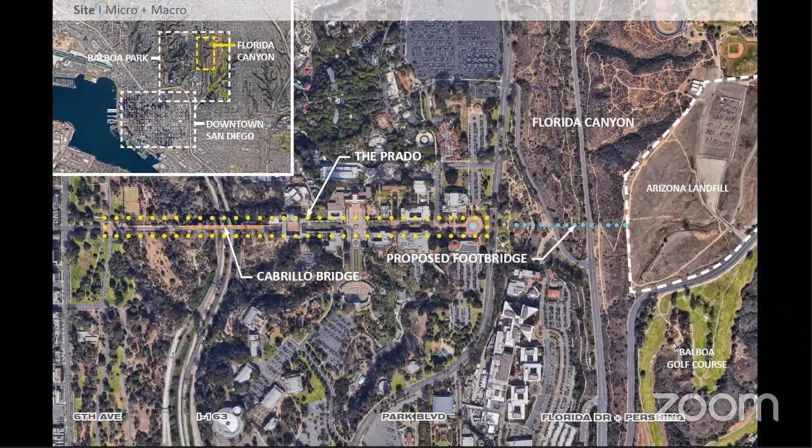There's a few reasons for a bridge at this location. The first is to facilitate an east-west connection, which is largely non-existent in the park. The second is to really spur development in the Arizona landfill. It's remained basically dormant for many years and is very much in need of a redevelopment, which I think can really be spurred by a footbridge. In fact, our master plan for San Diego really shows a footbridge at this location.

And so, as I mentioned before, the Cabrillo Bridge was a big source of inspiration, built in 1914 for the Panama-California Expo. It's a cast-in-place below-deck arch, and it has a great experience on top because it's completely open with all the structure tucked below. It creates a great experience, open views to the museums as well as downtown. And then below, it functions as a gateway in and out of the city when you're driving the 163.

The image below is the forming process of this bridge. It's said that there was 1 million board feet used in the formwork for this structure. And my proposal specifically seeks to eliminate formwork, push the boundaries formally for structural steel, and minimize the touchdown points, temporary or permanent, to the canyon ecosystem below.

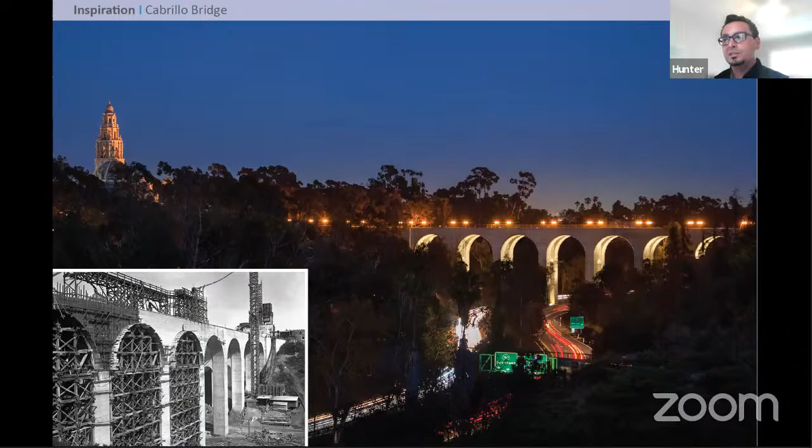And so there are many sources of inspiration for my design. One of them was the Cabrillo Bridge, and then the high degree of Spanish ornament that we see in our museums, from the Museum of Man and various other ones. Really just an incredible amount of relief, shadow, and light play on those surfaces that I really wanted to capture in the surface articulation of my design.

The second is the flora. There's a cactus garden that's quite large on the western rim, just next to the west entrance, and it features a lot of really beautiful flora, specifically this particular cactus, as well as the dragon tree, which has this really beautiful bifurcation in the structure that leads down to the trunk. And then we also have, oddly enough, scattered throughout the park, massive old fig trees, and they have this wonderful buttressing root system that's very fluid. And this concept of fluidity is something that permeates through my design, as we'll see.

And of course, the canyon itself was a source of inspiration. On the left there, we can see this network of trails caused by pedestrians, but also mountain bikers. It really has a cellular kind of network to it in its overall layout. But also the process of erosion, which is what created the canyon in the first place. You can see on the right there some of those fluid forms which are caused by water flowing over those surfaces.

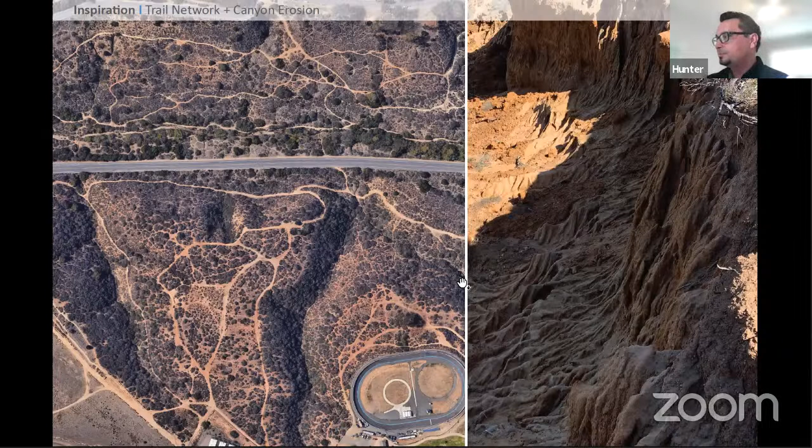And so I think a good way to summarize how the architectural concept came about was thinking about these three components being mashed up to drive the architectural design. So the Cabrillo Bridge set the tone for the experience and structure, meaning that the structure will be below deck. The upper side will be completely open to the views of the canyon and also to the bay beyond. And then the thought was to use the cellular network to really drive the global architecture and the structure. That smooth articulation would be used in that architectural design.

And then finally, the idea of modernizing that Spanish colonial ornament and using it to drive the surface articulation. But rather than the literal relief that we see in that type of architecture, we'd be using the fluid forms and shapes that we see throughout the park.

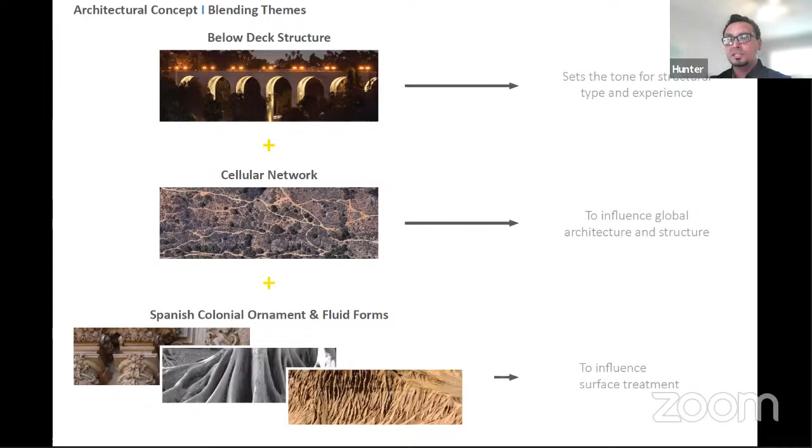And so here's the layout of the bridge. So we see in the upper left in the plan that end fountain at the end of the Prado. There's an at-grade crossing over Park Boulevard, a plaza, and then there's a series of 4 expansions and contractions in the deck. And what I would point out are these 4 apertures that are in the deck. It's a very unique kind of feature, because it allows people that are walking by to kind of look into the aperture and always be connected to the canyon below.

Over these apertures are actually a series of hammocks. So for those brave enough, you can actually venture over and kind of bounce along and just kind of hang out in that hammock, again, getting kind of a great experience to the canyon below. There's also vegetation throughout the bridge. The idea being that the bridge should feel, yes, an extension of the Prado, but also an extension of the park, where it's kind of blurring boundaries on where the park begins and where the bridge ends.

And so the layout of the bridge is 3 250-foot spans. There's a 3% slope up from the east rim to the west rim towards the Prado. You can see below we cross over Zoo Place as well as Florida Drive, and there are numerous trails that pass underneath the bridge, which give you great vantage points to view it.

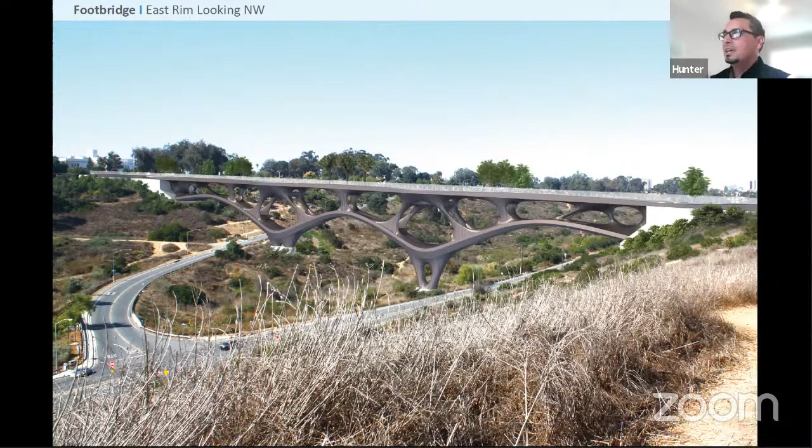And so here's my first rendering. We're standing on the east rim looking northwest. We can kind of see that cellular network that I spoke about. Also reminiscent, when you're standing here, that silhouette kind of matches up with some of those trail alignments, and it matches with those two geometries. I think it would be even more visible during the dry season.

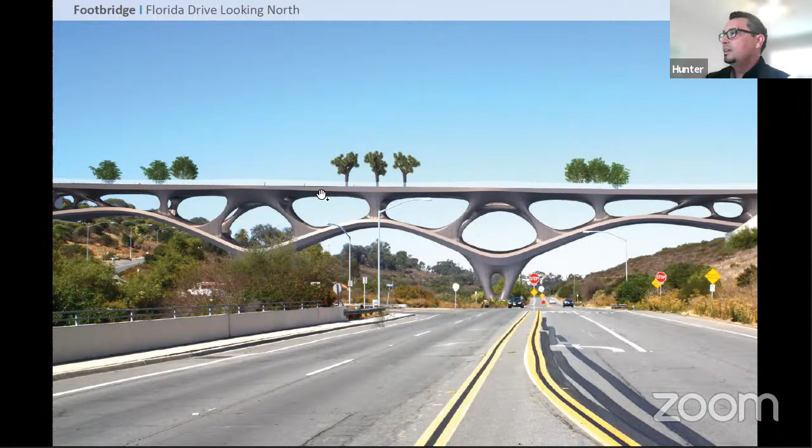Here we can see we're on Florida Drive looking north. You see Florida Drive continuing north there, and then Zoo Place kind of makes a left. And then, I know we were seeing some faint articulation on the bridge. Here's a close-up view that illustrates what kind of articulation we're talking about. And so before we were talking about fluid forms and the process of erosion and creating that canyon. And that's really what I tapped into for the surface articulation of this structure.

Using a water flow analysis, I was able to trace particles down the structure to the very base of the column. The whole idea being that it looks like there's a part of the canyon that's emerging onto the structure itself and climbing up, connecting the upper reaches of the bridge with the bottom. And then we see spherical articulations on the structure, which point out their end or even origin points, as the case may be.

So here's a view from on the deck, what that experience would be like. The upper left is below the structure, looking through the involutions to the hammocks. The upper right is a view at the entrance on one of those hammocks, and you can see how really connected visually the user is with the canyon below, despite the bridge. And then this aerial focus on the two splitting paths, which are each 10 feet wide.

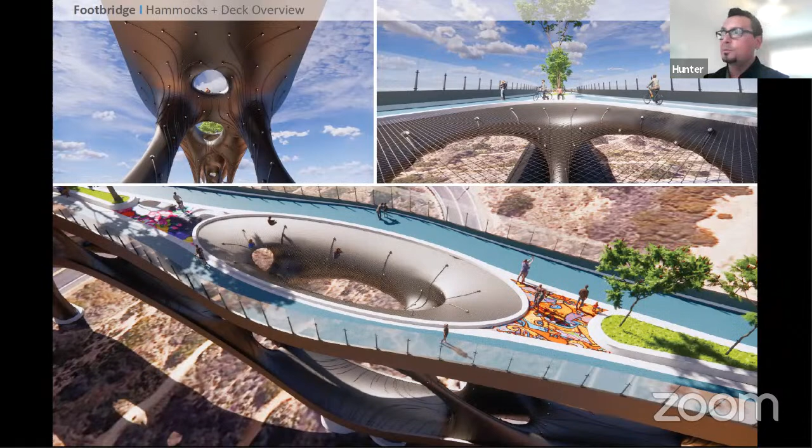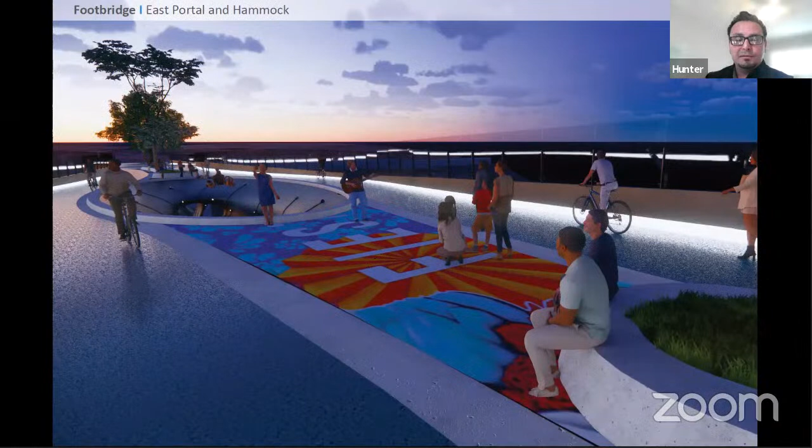One of the things I was asked to focus on after round one was the lighting system and how this would enhance the structure and tie back to the community. And so there's two ways that I chose to focus on this. The first is these luminous strips that are tucked into the barrier. They read like lines of light or ribbons of light that really focus on connecting the two rims of the canyon, but also providing functional light onto the deck.

And the second is those spherical articulations that we saw in the other rendering are actually luminaires. The idea being that when you're in the canyon at night, you'd be able to look up past the structure, and because of the sporadic locations of those lights, it really looks like a constellation where the silhouette of the bridge drops back, and those become really the focal point during night.

Here's another view. The upper one is looking on the eastern rim, looking southwest. You can see the Coronado Bay Bridge in the background there. We're using kind of a lighter color in the light.

But of course, with today's technology, programmable LEDs, there's some really interesting effects that we can achieve with lighting. And so this particular design looks at illuminating the arch member in red and then the yellow illumination of the soffit above. So with that, I'll play you an animation just to give you a better idea of the experience.

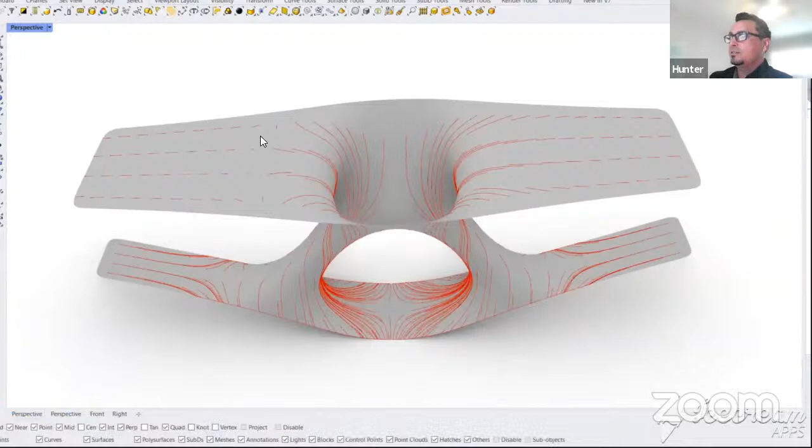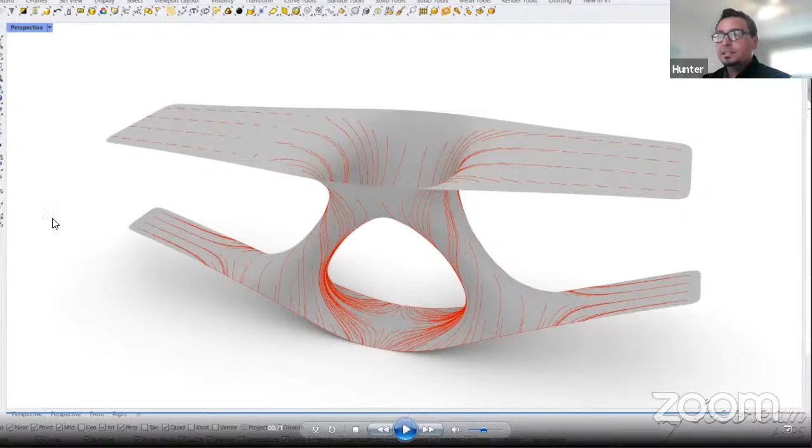The second process, where I described tracing the water down the surface, began with a water flow analysis. So you can think of that as an even distribution of points or particles that you're able to simulate their flow down to the lowest point, and then take that line and use it for my articulation of those beads that you see running up the surface. So I can switch back to my presentation for a moment.

We all know that those kinds of spline-like geometries are very hard to pull off and define and get onto a 2D plan set, right? It's nothing but splines, and so it's very difficult. We also know that steel does not want to take on doubly curved shapes, right?

So enter 3D printing. Using wire arc additive manufacturing, first invented by MX3D in the Netherlands, we're able to achieve very complex shapes and push the boundaries of architectural design, particularly in steel, I should say. And so what we're seeing here is their canal bridge in Amsterdam being printed in the upper left, another smooth component for another project, which has very similar features to my proposal, and then the final bridge on the bottom right here before it's put into place in the canal.

And I would say that this particular bridge is about the scale and size of the components that would be used in my bridge. And so if we take a closer look at what we mean by components, what I mean is that the whole bridge is going to be pieced together in small parts, lifted by crane and then bolted. So if we look at these two, this upper right one is a spandrel component, and the bottom is an arch component. And there's a three-dimensional section which is cutting through both.

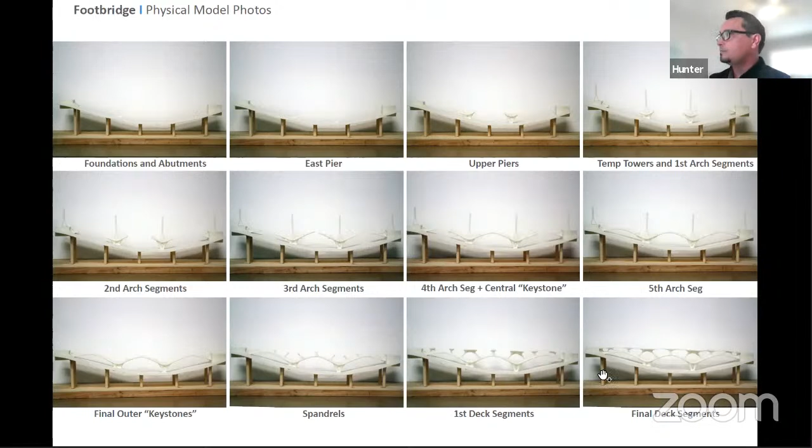So I'll just touch very briefly on some of the benefits of 3D printed structural steel. The file to factory delivery method is truly efficient. We're kind of eliminating / blending the designer's role in delivering a shop drawing. And we didn't have to define any of that geometry in 2D, which really is a big time saver.

3D printed structural steel simplifies engineering and enhances architectural design. As we can see with the surface articulation, the double curvature, it's meant for this kind of thing and brings steel to a new level that wasn't feasible before.

When I say it simplifies engineering, I'm really comparing that to, say, concrete 3D printing, which you still have to figure out how to get tendons and reinforcement in there, and whether it's a stay-in-place form, et cetera. I think it brings it back to a moment where, like, we were in university thinking about that section as poché space. Because of the strength, the ductility, the tensile quality of steel, it's the perfect material for that.

Fabrication speed is a function of robots, which is to say 3D printing is slow, but the more robots you add, the quicker you can go. And for construction, the idea of putting a temporary on-site facility on the Arizona landfill, since it's just open space, allows us to increase the construction speed and increase the size of components. Because we're not limited to the roadway or the truck width that would be bringing that component from a factory into place, it leads to a much more efficient and quicker construction process.

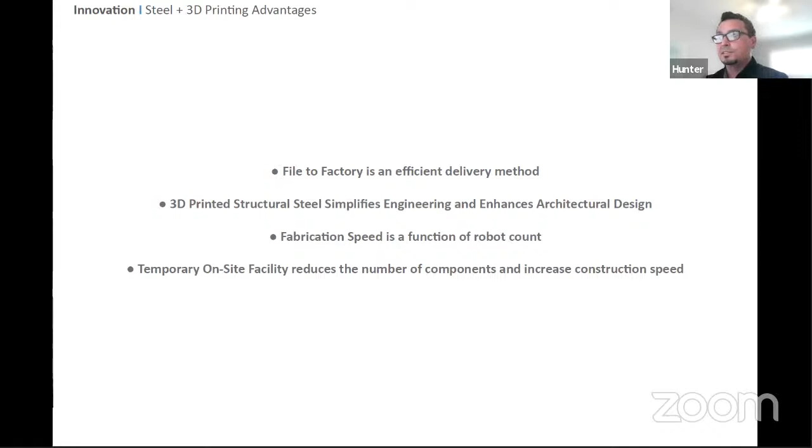Well, time. With that, I thank you. Right on time. So turn it over to our jury for a commentary. I guess we'll begin with Pascal, please.

Hello, Hunter. Thank you again for another great presentation. Always a pleasure to learn about your expertise in the matter, which is always evident as you present, as well as your passion. I really appreciate that you cited a lot of these inspirations on the project to be contextual and bespoke, which I always think is pretty cool. I also appreciated your surface articulation this time. The animation at the end definitely did help me understand what you meant in terms of the fluid mapping, and then understanding how the lighting components were embedded within them.

And I really love the idea of the, like, under the bridge looking up in terms of the constellation kind of idea of it. I don't know how that works with bird safety and nature, but I think it's really powerful that you explored and leveraged the articulation of the surface as a way of creating a strategy for the lighting. I also appreciated the way that you created the lighting process for those who are on the bridge itself.

The one thing that I will say that I think we talked about a little bit before that I'm not sure is addressed, I really love the apertures. And I know each aperture seems to be doing the same thing, the hammock. And I want to emphasize again the importance of accessibility and mobility and some of those challenges. So it would be interesting to explore the idea, because design is never done, right? Where some of those apertures might have a different kind of transparent surface where someone in a wheelchair or on crutches would be able to have that visual connection down below, while still having those moments of the hammock for the other kind of experiences.

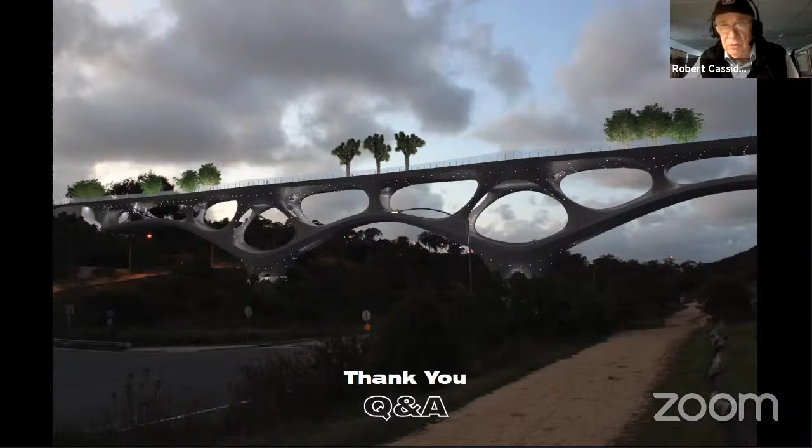There's a political angle to this bridge, and that is that, you know, we've heard, will there actually be an infrastructure effort here? And, you know, Biden is, and I don't want to get political here, but this is the kind of project that can get widespread support. And I could see 10, 12 fabrication plants around the country doing this kind of thing, knocking down the terrible bridges. What do we have? Thousands of bad bridges in this country. Take them down and replace them with models along this line.

So I think the feasibility and the 3D printing aspect is just terrific, and very, very exciting to me. And I really think it can work. So those are my comments, and it's beautiful looking too. Thank you, Robert.

Thank you. So with that, we're going to ask Hunter to release control of the presentation, and we'll move on straight to our presenter. Okay, June, whenever you're ready, you can take it away.

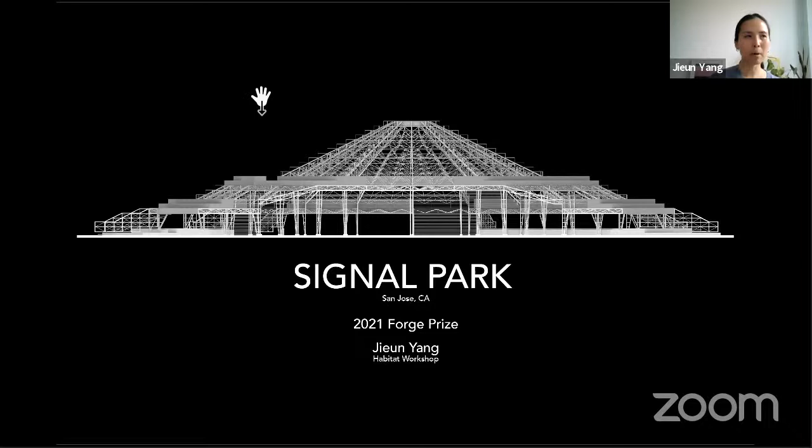Great. Thank you, Alex. And thank you for this opportunity to speak about Signal Park, located in San Jose, California, that was really conceived as an urban design and park for the community. First, I want to discuss a few of the project goals coming out of the first phase of the submissions.

Signal Park is a cluster of urban villages created by overlapping topographical mounds that reflect the vista of the surrounding natural landscape. It's situated on about 4.5 acres of land, and it's bound by St. John Street, Santa Clara Street, and North Autumn Street, and also bound by the highway that you see on the north side of the tennis courts.

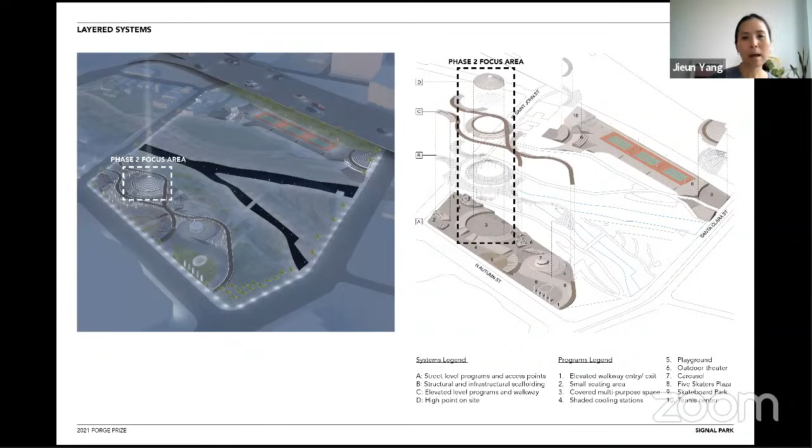It's really multiple program layers that are centered around the ring, and these rings interlock and connect, so all the paths are accessible by the connecting elevated pathways that connect these different rings. So given the vast amount of the site and the elements within the site, what the project focused on for phase 2 was to tackle the biggest ring, thinking that it would be a modular structure that could be scaled up and down and be populated throughout the entire site.

A few of the main goals that we wanted to carry through in phase 2 studies: the first one was thinking about the nature and really maintaining the form of the project, reflecting back on the nature and thinking of it as a habitable icon for San Jose. Initially, the project was conceived with post, truss, and rings that cover these vistas. And these are the structural members. So really wanting to make sure that there's viability in constructability and also fabrication, so it could be easily constructed and transported.

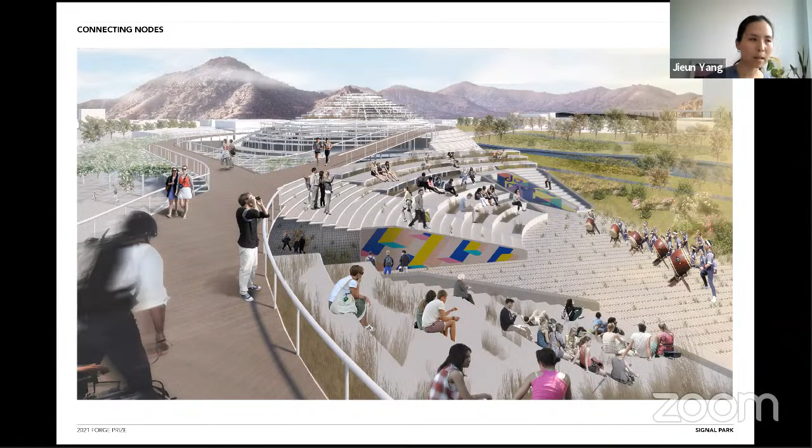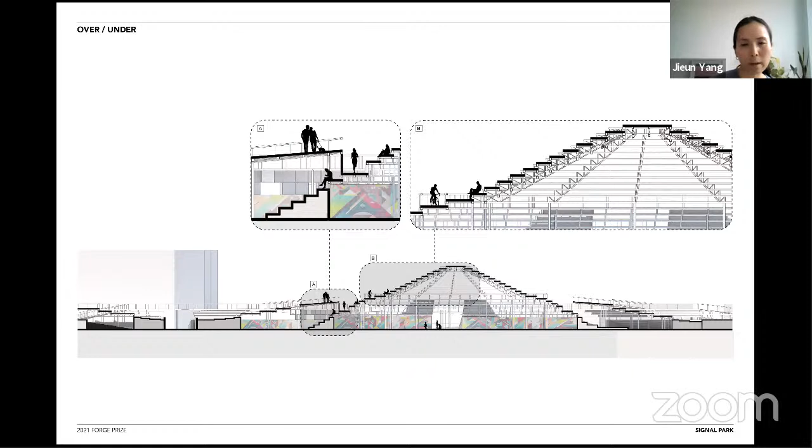And also maintaining that each program becomes a nodal point, and making sure that these elements can be connected via pathways, and thinking about the materiality of these elements. Another example of the use is the over and under conditions. As these are overlapped, you begin to inhabit the upper deck and also the lower deck. One of the comments earlier on was about accessibility and safety, of what is accessible area versus non-accessible area. So we wanted to focus a little bit more on clarifying that boundary in phase 2.

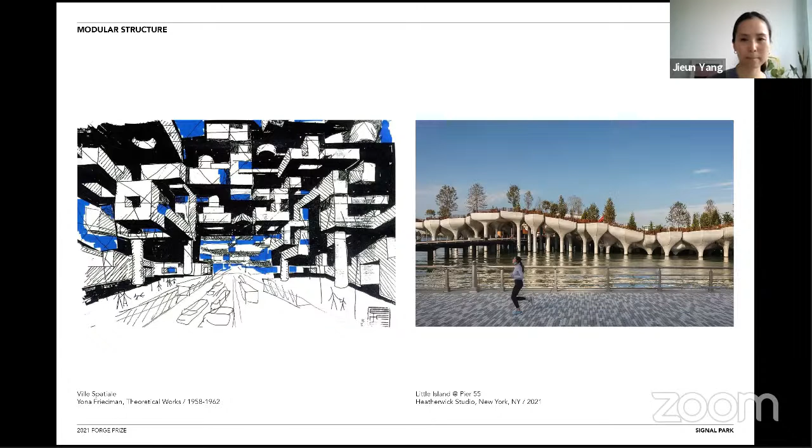I wanted to talk a little bit more about the background and the inspirations. So here we see 2 examples, Ville Spatiale and Little Island in New York, that really deal with this modular idea, a modular structure that can be gathered together to create a public space that can be shared by everyone. Also, thinking about steel as a way to sculpt form, something that elevates us, something that lifts us up, and doesn't become this idea of a dingy underside that can be inhabited.

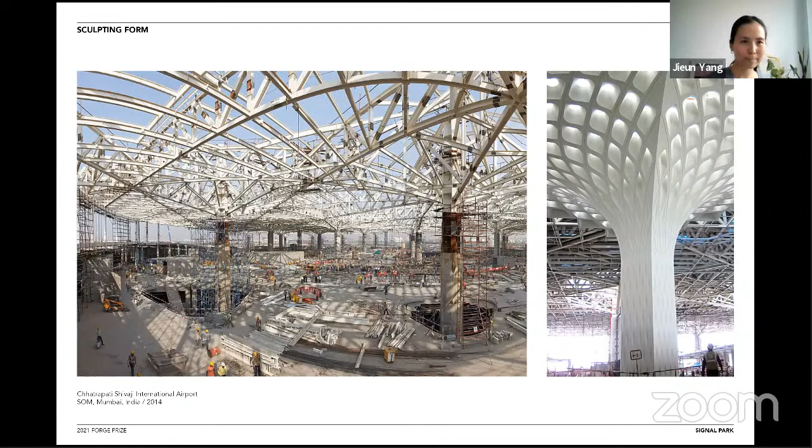So as we move forward, we'll show a little bit more about the materials, modules, and connections, really trying to work out a system that can be clearer in terms of the constructability and modularity of the structure. So the first step that I worked on with Jeff was really figuring out the basis of modularity. Here, the radiating ring is divided into 24 equal 15-degree divisions, and also the radial offset at 3 feet. And the largest ring on site is at maximum 102 feet.

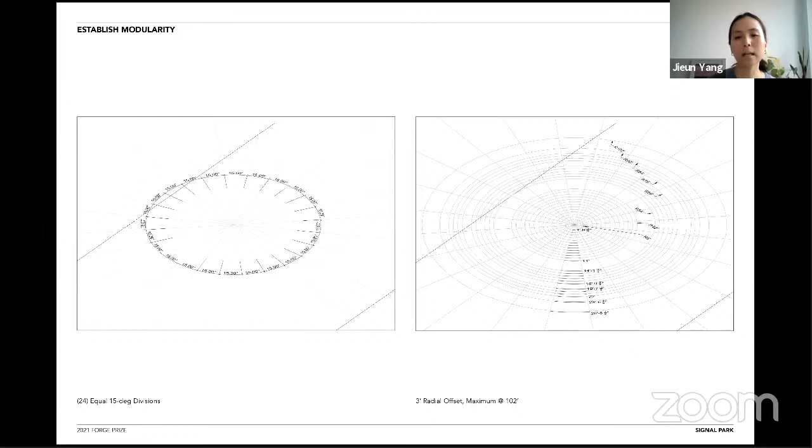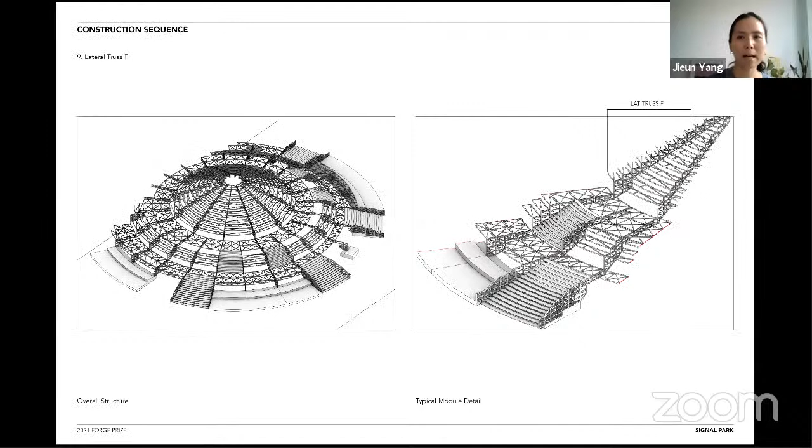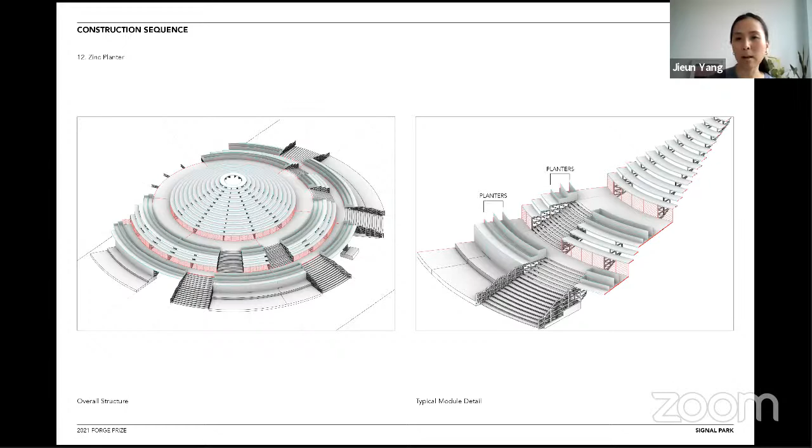Here you can begin to see the articulation of how the different finished surfaces are treated. The perforated panels indicated here are the non-accessible, non-walkable surfaces. And then the boardwalk and guardrails, so there is a separation between what people can climb onto and what people can't. And then the planters also work as a natural barrier as well as providing landscape to the project.

One of the tricky things about this first iteration was there is a blunt endpoint that's bound by the site boundary. And this open-ended lookout point became a problem in terms of how to truly brace that area. And here was the initial radial truss profile section. As you can see, the first walk path is at elevation 9 feet, and the second walk path is at 16 feet, 6 inches.

And this is the initial sketch of the mentor, really thinking about what structural efficiencies can be considered, and also really thinking about the modules. There was this initial hope that I could get rid of the vertical posts, but unfortunately that didn't quite work out. They ended up being required to really work with the modularity and also the structural stability.

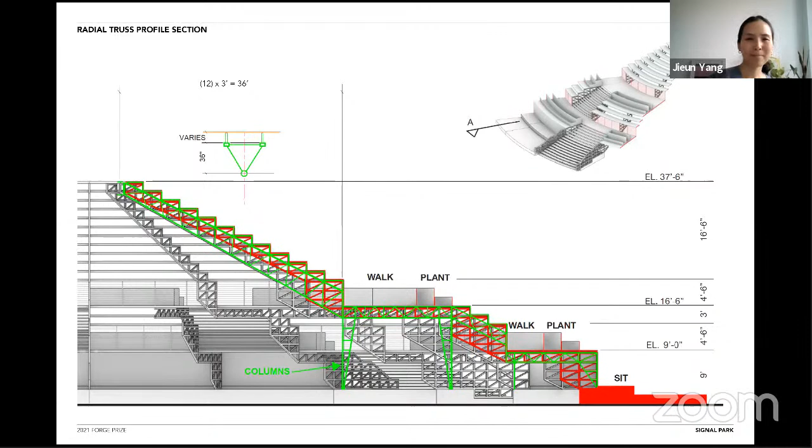Thinking a little further on the materials, first, the architecturally exposed structural steel, AESS, being used widely, especially in my past work experience working in transportation, and I wanted to make sure that we could make this buildable and also cost efficient. So thinking about the different category matrix, AESS2 being less visible elements and AESS3 being more visible and proximate elements.

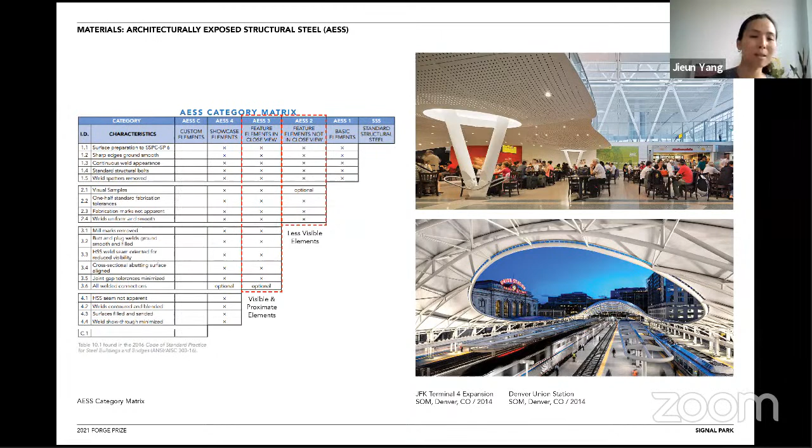Also thinking in terms of the finished surfaces and how it could be a sustainable material that could give this airy feeling on their side, and also stiff and durable enough for people to walk on and weather. So here, the zinc non-walkable surfaces are used as a way to patina over time, going from this light warm blue into more of a matte gray over time. And you can see the magnified freckles there.

And for the decking areas, it will be modified wood decking that would patina over time in a similar way, turning from a brownish color into a more grayish tone. So with the comments from the mentor, the next step was really figuring out this idea of lattice work as a refined structure. So another series here.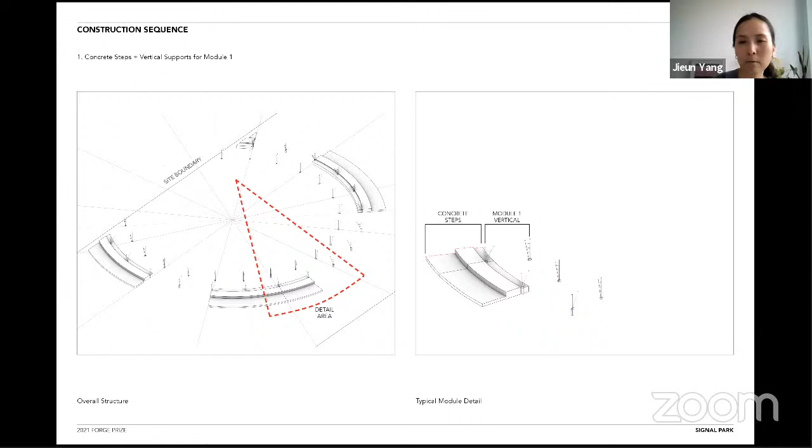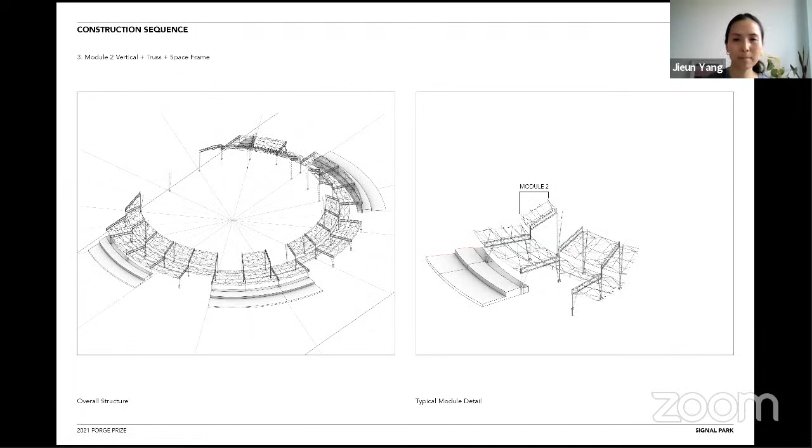So first here, the difference is really introducing the vertical modules at the very beginning. And then module 2, now this is the truss members and also a space frame to give a little more stiffness to the overall structure without overshadowing the underside. And these become almost like a lattice work that is very light and airy. Second module going up. Third module, fourth module.

And then what was added as part of the sketches is the top ring to add more stiffening at the top, and also stairs A and B get inserted here. Here, one of the main ideas was that the truss had to be angled to be more efficient and constructible. So these are what's called step plates, which are essentially thin plates that are welded onto the truss member. They really begin to articulate the step form of the project.

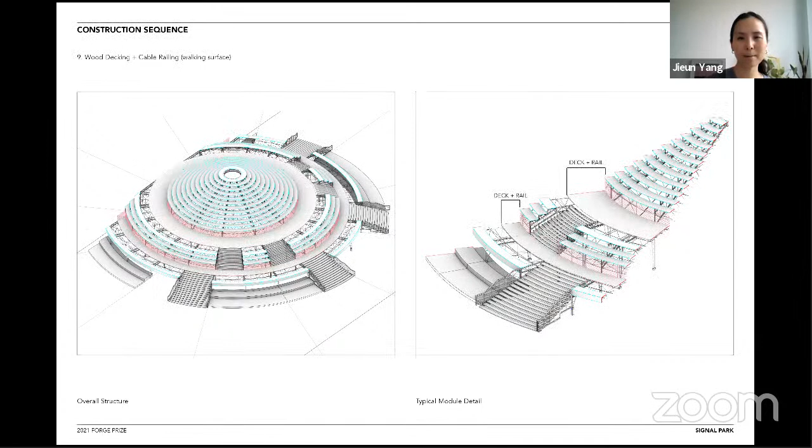And then finished surfaces going on, so zinc panels, deck and rail, and the planters. Here you can see the resolution of the open-end lookout point where the linear horizontal bracing is attached across the whole cut of the site with vertical supports. And here's the revised truss profile in section. So this is cutting exactly through the bottom, the concrete, the seat area, and then the 2 tiers of the walk surfaces.

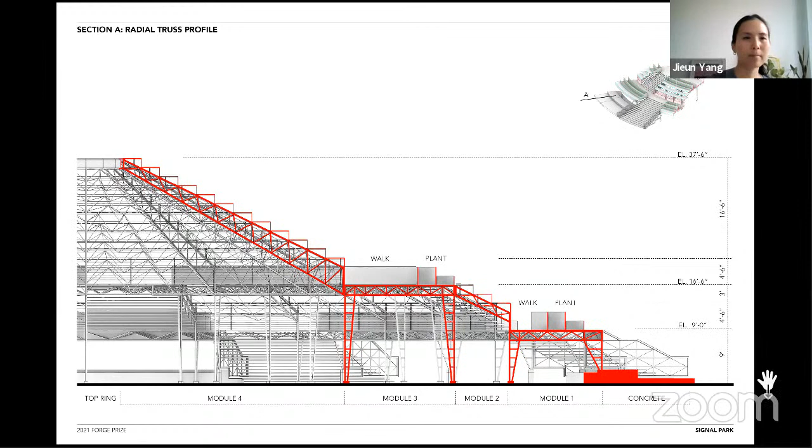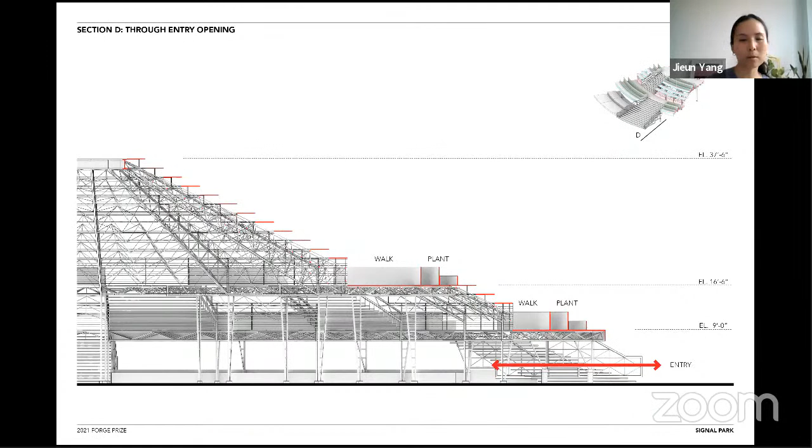And articulating the typical module here in more detail. On the left, you see the scaffold, the lattice work of the structure that's formed by the vertical members, the trusses, and the space frame that fits in between the two trusses. On the right, you see the articulation of the finished layers on top of the structure. So this is from ground to first tier deck.

You're beginning to see the vertical supports, and you'll notice the circular areas noted as concealed bolt zone. So these are the questions that we had on where to use welded connections versus concealed bolt connections. And the discussion that we've had with the mentor is that welded connections would be perfectly fine for less visible and less proximate areas, and concealed bolt connections where one could actually touch and see, which would be a better finish in those areas.

As you can see, the trusses are made of 3 inch by 3 inch HSS top and bottom chords, with 2 inch diameter HSS truss webs. And the space frame, 1 inch in diameter, is shop welded as a module that gets shipped.

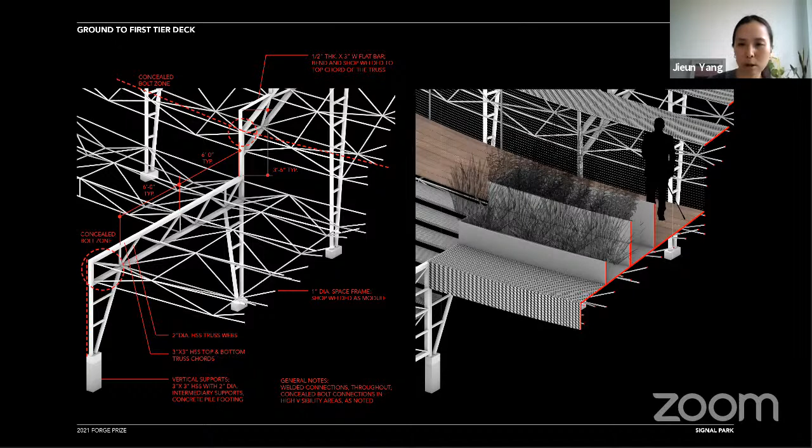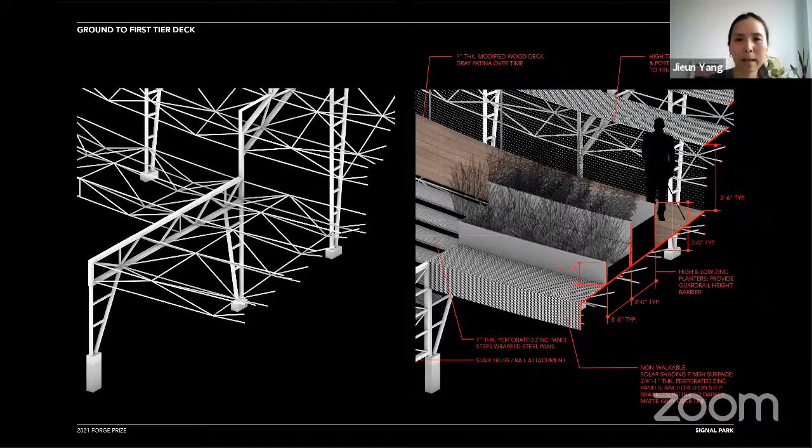And here you see 1 inch thick perforated zinc panel steps for the stair, and similar for the non-walkable surfaces. And for the planters, high and low planters that are made out of zinc as well, that are set to a guardrail height to provide a natural barrier. And 1 inch thick modified wood deck on the walking surfaces.

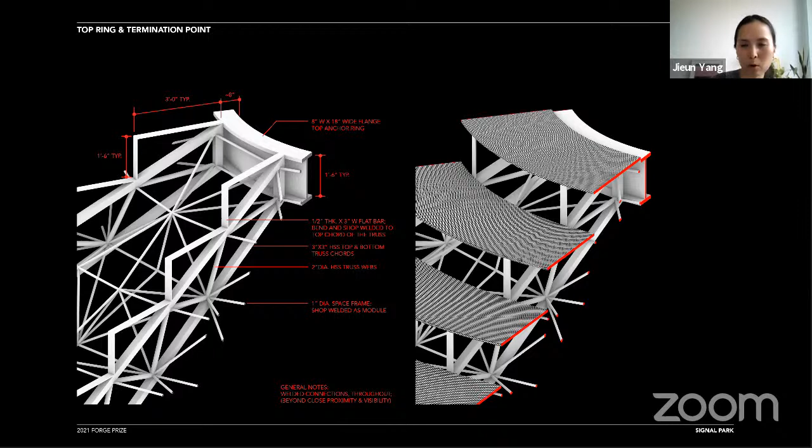And at this point, it's really high up, about 35 feet or so. So all of these will be treated as non-walkable surface. Really main goal of providing solar shading finished surface. That is about 3/4 of an inch to 1 inch thick perforated zinc panels here.

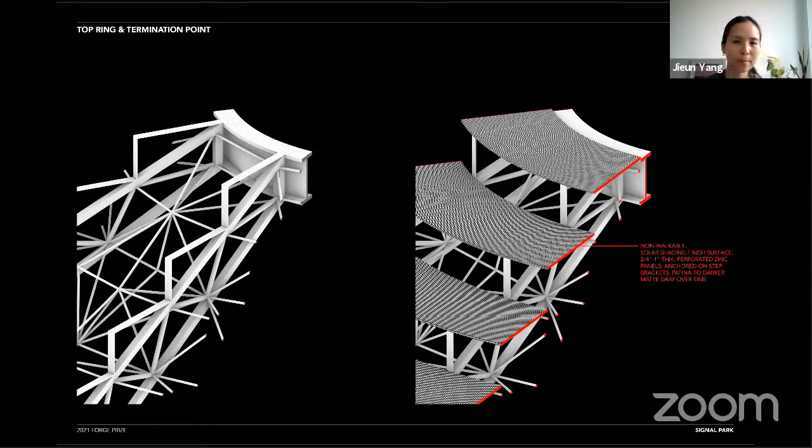This is the updated view of what that space would look like. Although we couldn't quite figure out how to do without the vertical structures, because the members are really thin, and because it also works with the overall lattice work-like structure, it doesn't seem as overbearing as the first phase submission here.

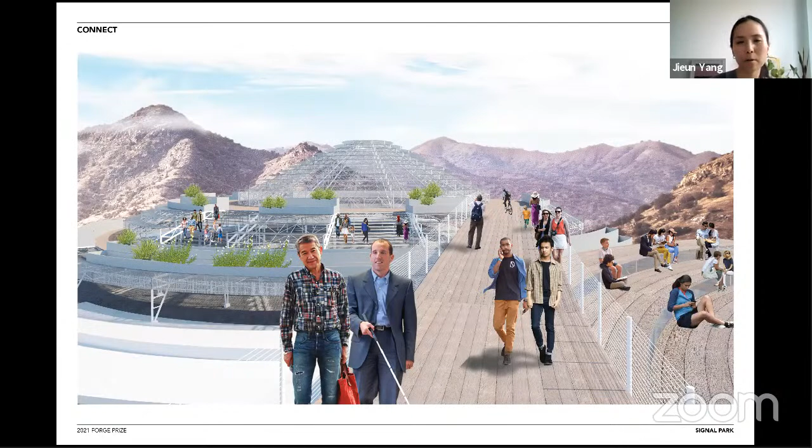Here, the idea of the pause, the reflection with the landscape and the structure, and also connecting these ramps that connect from the ground up to the second tier ring and the first tier ring from the other side. And this is a view of the open end lookout point and elevation. And that can be inhabited in multiple ways, whether you're under the ring, on top of the ring, and connected to the other rings. Thank you.

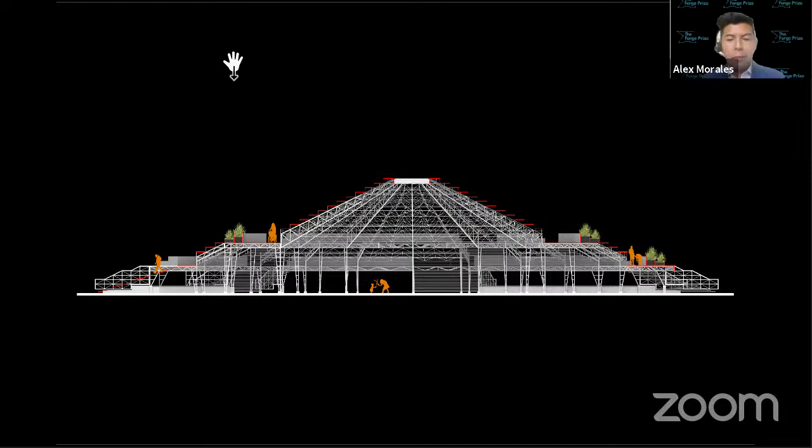Thank you, Jieun. So let's go ahead and turn it over to jury commentary with Pascale first. Hi, again, nice seeing you again. Congratulations on being a finalist.

I really appreciated seeing the evolution of the project and the exploration and really speaking to the components and how it would come together. I know that was one of our strong recommendations the last time we talked. I think towards the end, there was a slide that you said that there's a ramp, and I didn't understand how that connected or worked or integrated into what you had shown here.

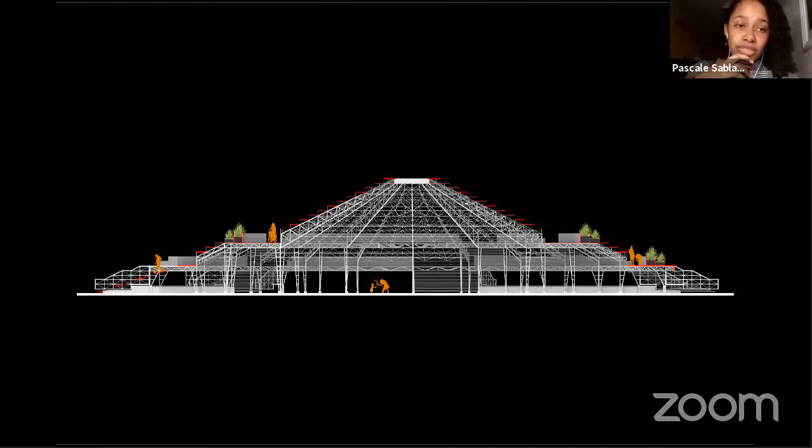And, you know, staying consistent with brand, that was going to be my number one comment, which is about accessibility and access, and not that it should be a completely separate thing, but ways of integrating it. And from the rendering that you showed, it seemed like it's a ramp that kind of connects to it. And I wonder if there was a way of leveraging the circular components as integrating it so that they didn't feel separate, but really more integrated into the design so that people can explore both components. I think that would be powerful.

As well as I was interested to hear the lighting strategy in terms of how the lighting was integrated and the ways that the project could be utilized in terms of the longevity in the day and night. And then with your site plan, you had shown a series of articulations of spaces. And I wasn't sure whether what you were showing was a typical typology of the structural infrastructure, and then it would be addressed in different scales, or if all that integrated only into one building.

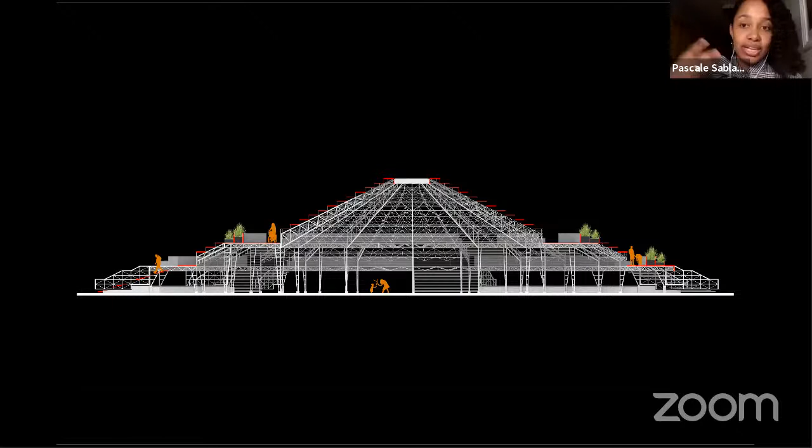So I would say thank you so much for really deep diving and getting into the structure components. I appreciate that we started to really strategize with your mentor of ways of handling the vertical component where it wasn't so obtrusive in the space and really allowed for more gathering, right? More gathering, more pausing. But again, just really creating an experience where everyone is welcomed and appreciated and part of a similar experience rather than having their own separate entrance, but really being integrated to the way the design and the project functions. Thank you.

Thank you. All right. Thank you, Bob. Yes. Hi, Jieun. Nice to see you again.

First, right out of the gate, I love the amount of additional thought and rigor and effort that you put into your project, especially to see how it's continued to evolve from the first kind of work session that we had. And I also think a special congrats to the mentor that you worked with. The amount of collaboration that was apparent in your project was really, really rewarding to see.

You know, I think the strength of this project is that it feels truly like a destination location. I mean, it seems like a place that I would want to go and experience, which is kind of the hallmark starting point for any kind of one of these public amenity type spaces. The variety of spaces that your project created and the opportunity for a really huge array of community programming is something that I personally really appreciated,

that kind of drove a lot of the spaces and the solutions that you came up with. I also appreciated the addition of the visioning and inspiration images that you added to this presentation this time around. It helped me understand a little bit more about what your goal was. So congratulations on that. And the touch point we had at the beginning, the actual construction, the actual parts, the rigor and the logic that you put in, I think it really did make a difference to how I interpreted your project.

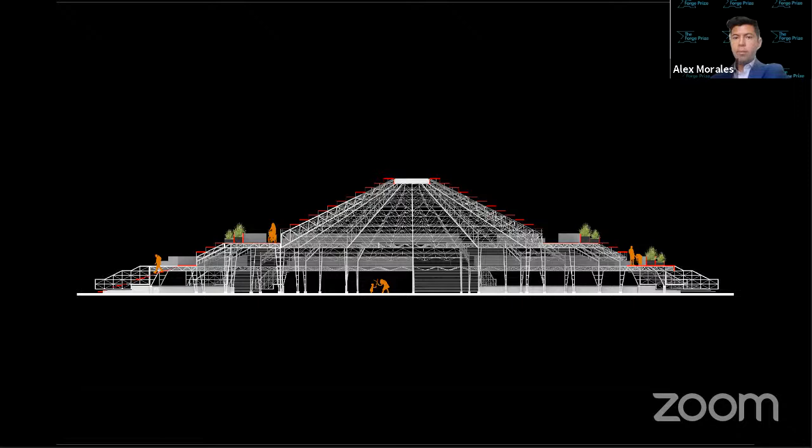Thank you, Bob. Great work. Thanks, Bob. Robert.

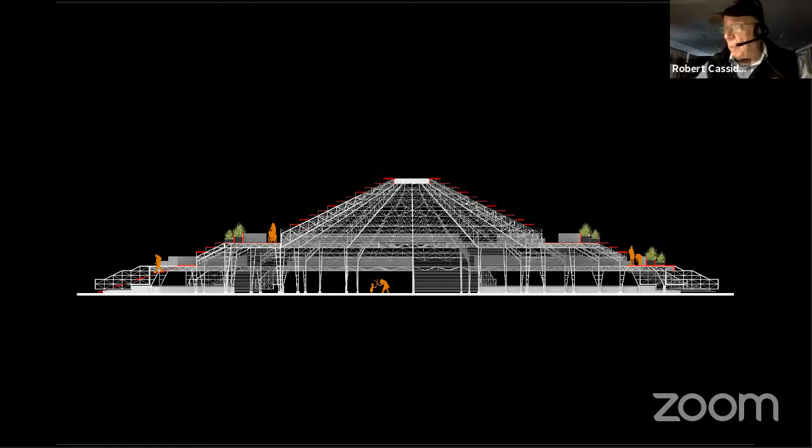June, excellent presentation. I see a rising star here. As we mentioned in the first round, 50% of your job is selling your projects to clients and the public and community and so forth. And you've done a great job here with that. I appreciated the effort you and your mentor made to make the structural posts much less noticeable and much more integrated into the design. That bothered me in the first round, and I think you've pretty much eliminated that problem. So that's a big plus in my view.

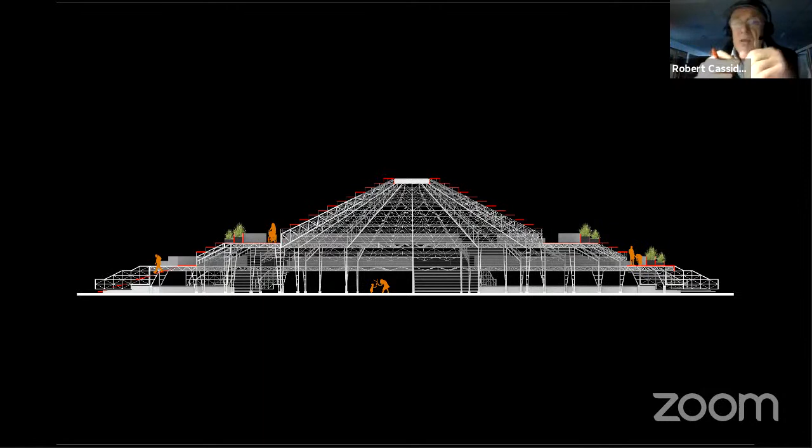And finally, this is a beautiful structure. We wouldn't want to take this and just dump it anyplace else. It's designed for this space in San Jose, but the concepts here could be applied to so many other possibilities, particularly in the Southwest and in the warmer and drier climates. So I think you've got something here that could be reproduced in some form around the country. It's not just a one-off, it's got some possibilities with legs on it. So well done, congratulations. Thank you, Robert.

You're welcome. Thank you. Good stuff. So I just had my second cup of coffee. Now I think we're really revved up now, right?

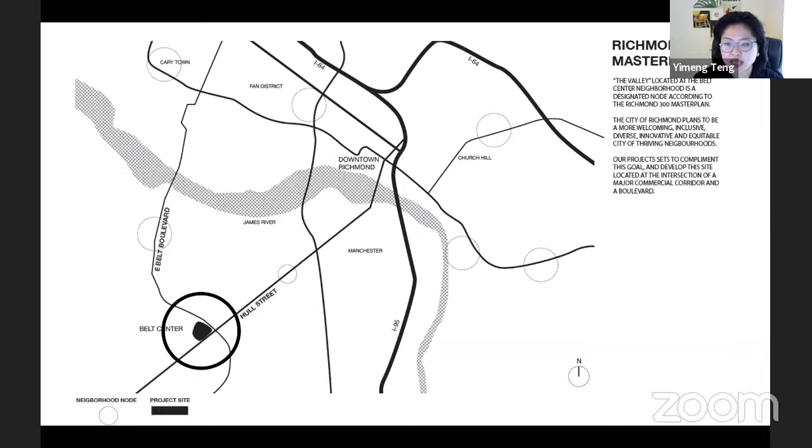The site is located at the Belt Center neighborhood, a node designated as a priority area for development in the master plan, aiming for growth in residents, jobs, and commercial activities over the next 20 years, up to the city's 300th birthday. At the intersection of a major commercial corridor and a boulevard, this design creates a much needed walkable, human-scale environment in place of the sprawling car-centric expanse. These interventions I'm going to show today will set the stage for this area to evolve into a multimodal transportation hub.

The site itself sits within a commercial zone serving a large residential neighborhood. The demographic of the residents is largely African American, and 40% of them are at or around poverty level. The project's program is determined to respond to this context with the aim of creating a hub for commercial activities, business opportunities, and civic gatherings.

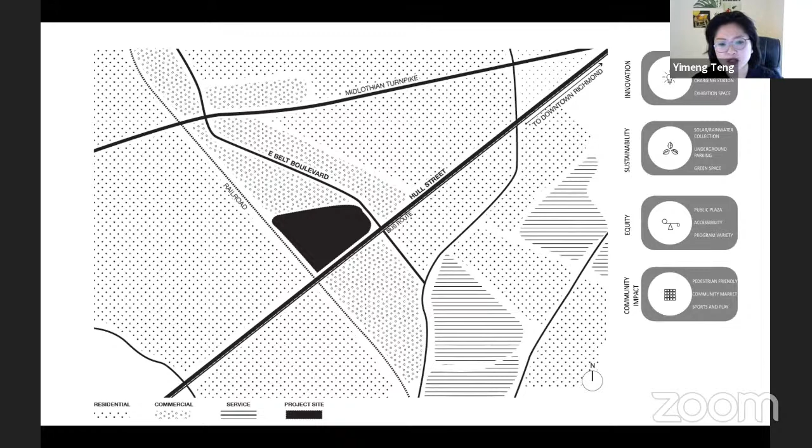Most importantly, we set our main goals in the beginning to have all programs and features developed around these points, which are innovation, sustainability, equity, and community impact. During the design, we always come back to these to check if we meet the initial concept. And hopefully, at the end of the presentation, we can proudly say we achieved these goals.

Currently, the site is an underutilized strip mall with a huge surface parking lot. The redevelopment will maintain a relatively open landscape, with the center of the site being a public plaza as a medium for expression, protest, and criticism.

In recent years, we've seen people across the country demanding change, from the Black Lives Matter movement to Stop Asian Hate protests. In times like these, an open and accessible urban plaza is a powerful tool for the people to rally support for issues, voice demands, and exchange ideas. This project uses this fundamental need for collective space as an initial concept and develops programs and forms around it.

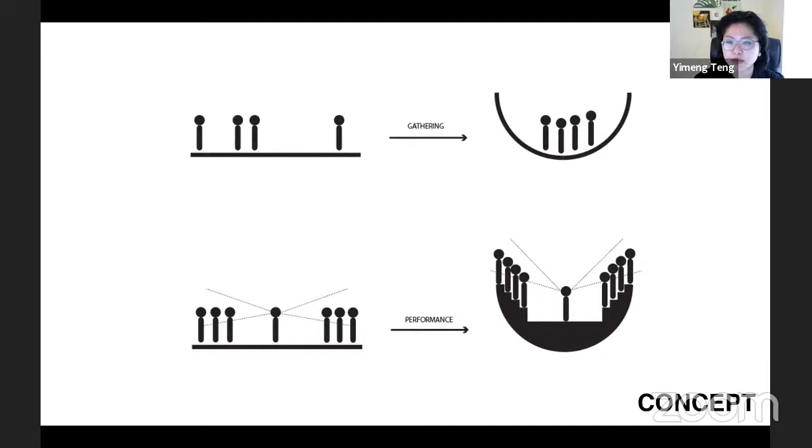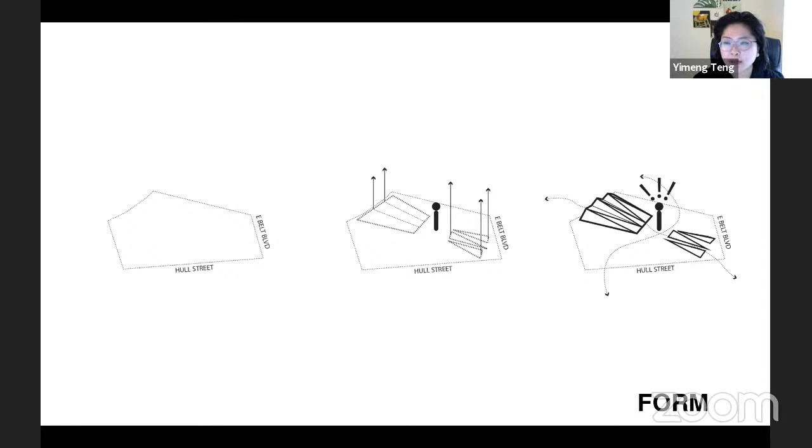Toward the street front are pavilions that act as gateways, while the other side is an indoor marketplace. The triangular forms on both sides emerge from the ground in the middle and open up to the neighborhoods beyond. Just like a valley in nature, we made full use of this form and geometry to integrate sustainable features. Large north-facing surfaces have skylights to harvest daylight into the market, while south-facing surfaces have BIPV for solar power generation. The sloping form makes rainwater collection possible.

From the roof, rain is collected through the major columns into the building, then piped underground to the north and south wet pond areas, where it is featured as a landscape amenity. Here is an overview of the site development. It is at the crossing of these two major boulevards, with already quite a few public transit stations adjacent to it, which makes this destination easily accessible by the larger community.

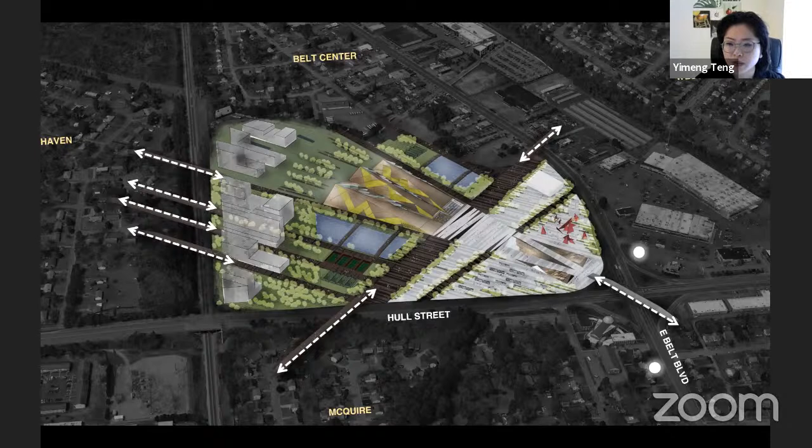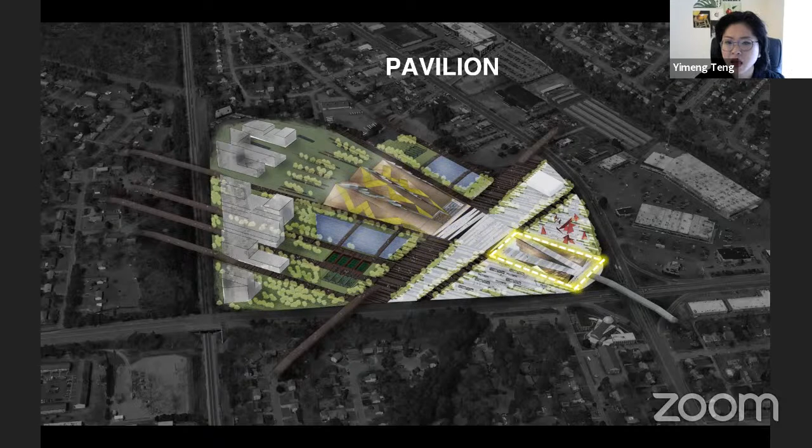For the surrounding neighborhoods, we are proposing multiple pedestrian bridges to further encourage a more walkable and bikeable environment, making these amenities more appealing and welcoming to the residents. Within the site, there is a mixed-use indoor marketplace, a group of 3 pavilions as gateways facing the crossing, with a central plaza in between.

On both sides of the market, there are wet ponds as landscape features and some sport areas for the neighborhoods to enjoy. Closer to the west edge of the site will be some future development of high-density housing, a prototype we are increasingly seeing in cities at this scale nowadays. Last but not least, there are also destinations for public art to happen towards the street front.

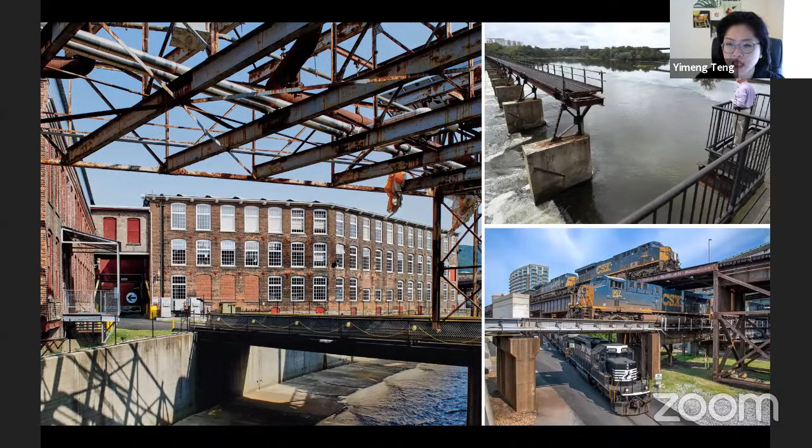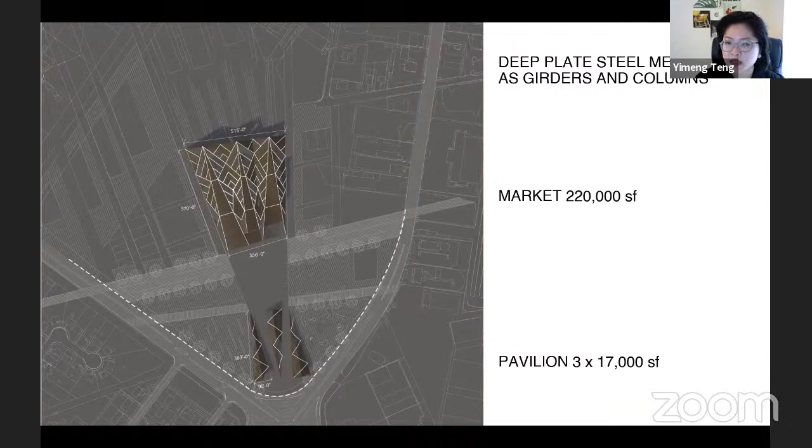Richmond is a vibrant southern city with a rich history of industry and transportation, the remnants of which enliven the character of the urban environment today and make building in steel a natural fit into the context. The main structure for the market and pavilion is deep plate steel as columns and girders, exposed in the interior as a unique architectural expression to celebrate the use of steel.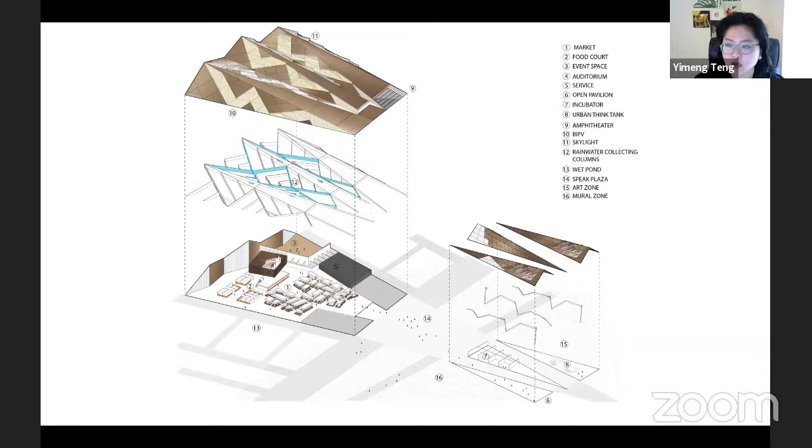The deep steel plate structure holding up the triangular facade becomes a sculptural element for the interior. On the exterior, the market has insulated metal panel and pockets of skylight or BIPV. For the pavilion's steel sheeting scheme, a similar grid form is used, but scaled down. Now we are going to look at the structure of each building in detail.

The pavilion is supported by steel plate columns and beams, with the columns forming an A-shaped frame zigzagging across the whole length. Those horizontal AESS steel plate beams sit on top of those columns to hold up the facade. Certain areas have pockets opened up at various heights to add visual interest and invite daylight in.

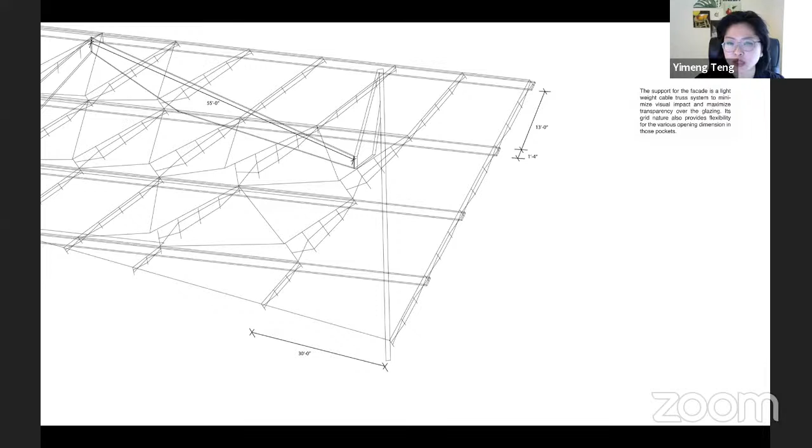The support for the glazing and steel sheeting is a lightweight cable truss system to minimize visual impact and maximize transparency. Although this kind of cable truss system is usually used for curtain wall, here we use it on steel sheets as well for a unified interior look. Its grid nature also provides flexibility for those various opening heights.

The visuals we are aiming for is a clean look from the exterior and the light shines through those peeled openings. You can see from this view the market beyond. These 2 structures in different scales echo each other in form and materiality. The market facade is laid out based on the internal structural grid. Glazing happens along the main columns as a signifier of structure to the exterior.

The north has laminated safety glass as skylight, and the south has a BIPV to harvest solar energy. When water contacts the skin, it is directed to the base of the valley and then funneled into the 4 rainwater collecting points that are built in the main columns, which are highlighted here in blue. Where the building meets the plaza, it has an amphitheater, entry, and site furniture area to take advantage of this gentle slope.

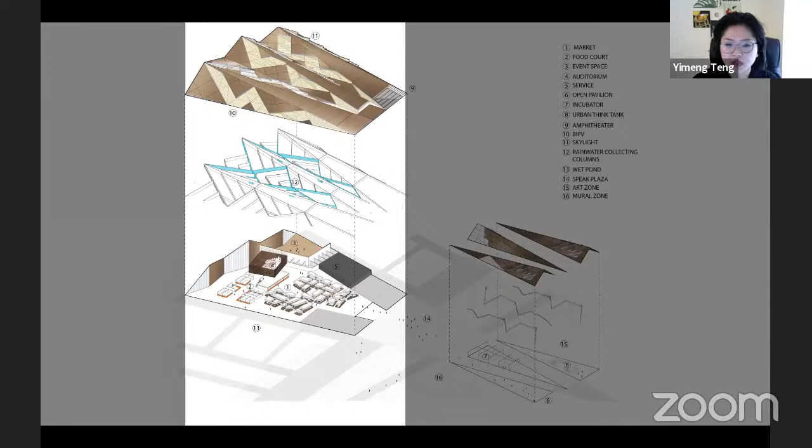Here is a zoom in of one of the columns in the market interior with the typical elements. The main beams and columns consist of 2 steel sheets welded together with ribs. We are trying to achieve a deep, flat form to showcase a planar and sharp look of steel. Following the angle of the facade, this forest of interlocking flat steel members of various heights achieves the sculptural look that we aim for, a steel construction and architecture that will be unique and poetic.

For the facade on top of the structure, where skylight happens, AESS steel plate beams and tension rods are used to hold the glazing panels. The solid parts are insulated metal panels supported on metal decking, which is painted white and exposed in the interior. Rainwater is piped down in those highlighted blue areas, where extra steel is welded to the corners as enclosures.

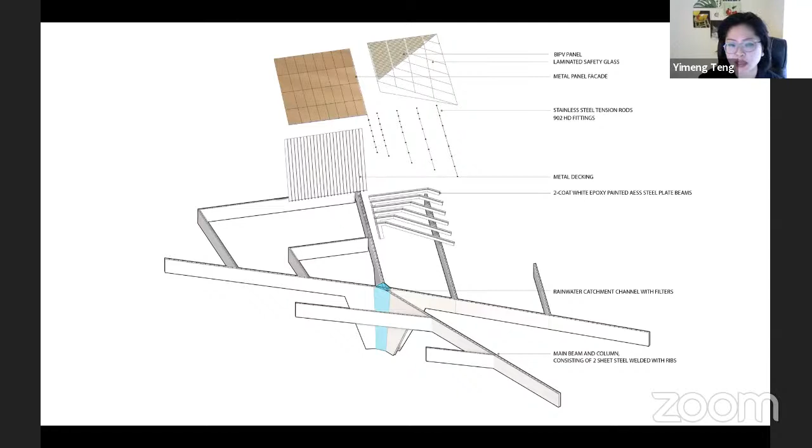For the south-facing skylight BIPV, to achieve a more unified and playful exterior look, an orange-colored see-through active solar glass is used to match up the surrounding metal panel. This see-through solar panel not only generates power, but also functions as a heat shield, preventing excessive solar heat gain.

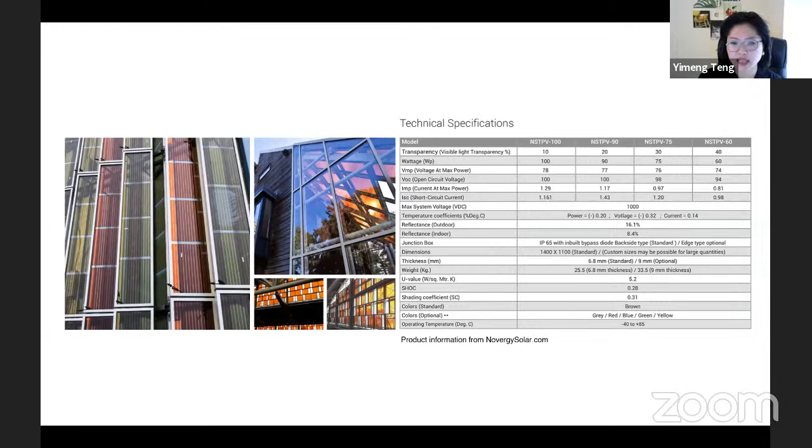With the skylights and market stalls built in, this interior space has a palette of black, bronze, and orange to create a vibrant atmosphere, to be enjoyed by many under the canopy of steel. And from the exterior, those skylight pockets will light up in the evening, revealing the main structural logic and elements within.

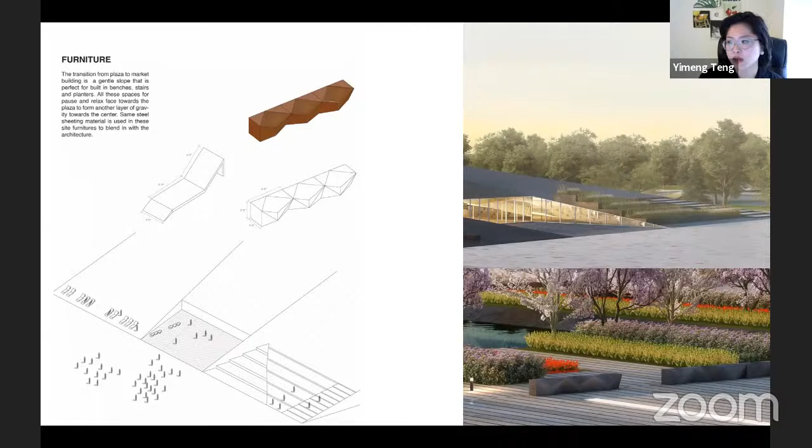On the building surfaces adjacent to the site, stairs, benches, and planters are built using the same material as the pavilion to create spaces to pause and relax toward the plaza.

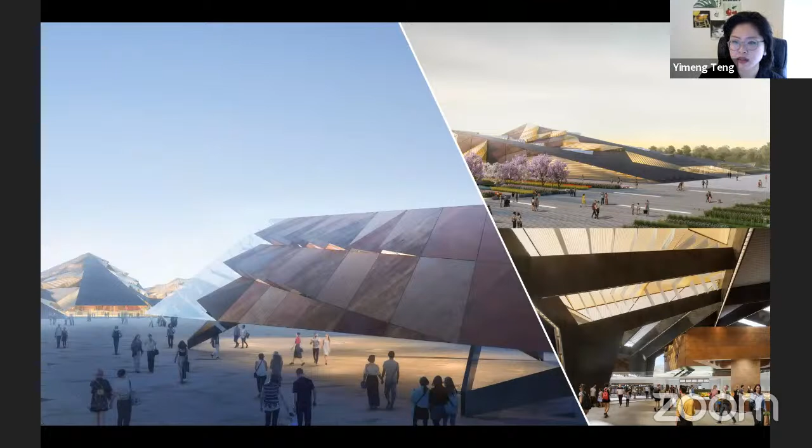Looking through the whole process, we tried hard to hit our initial goals by developing unique and innovative structural systems, creating an inviting, open, and accessible urban landscape for everyone to enjoy, incorporating sustainable features to the site and buildings, and developing diverse programs for the community. We hope this project can be a creative test bed for the Richmond 300 Master Plan and encourage the public to think how architecture and design can help to shape a better neighborhood and a city beyond.

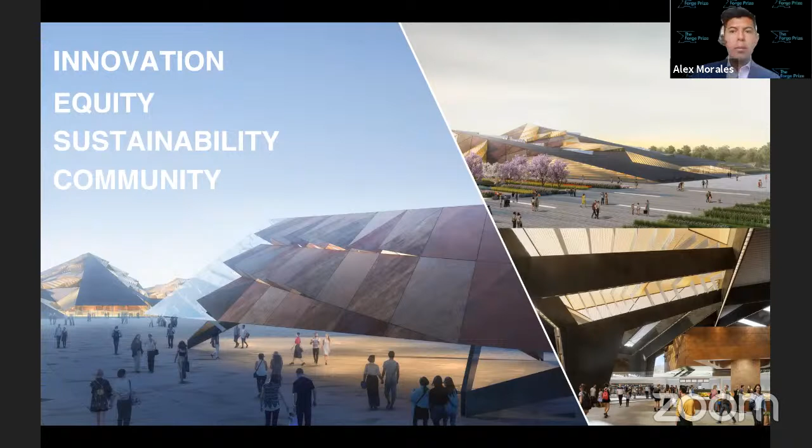Great work, Yiming. It's really incredible how everyone's designs have evolved, and the amount of work is really, really quite amazing. So with that, let's go ahead and get started with Pascal on the commentary.

Congratulations again. Thank you again for your beautiful presentation. There has been tremendous development on your design and your project since we last talked. As always, this project has a special place in my heart because it is community focused and creating those spaces and addressing those components and issues, which I think is powerful.

You know, one small critique that I did have in terms of your visualizations is that you have noted that it was an 80% African-American community, but in your renderings, that's not the kind of entourage that was represented there. So I would be mindful to make sure that you represent the community there within those spaces.

I also truly appreciated the fact that you actually did the community engagement and had meetings with the local Richmond community to get a sense of their point of view on the project, because community engagement requires discussions and relationships and collaborations with them. So I thought that was huge. And I really want to take the moment to applaud that part of your process. And it clearly really informed your design and created some important moments of innovation.

I think this was the first time we really got to see a beautifully articulated interior, to see the type of spaces that were created by that development with you and your mentors, and how the structure would come together and those components would merge. I appreciated the different materials and the sustainability lens that you brought to the project as well.